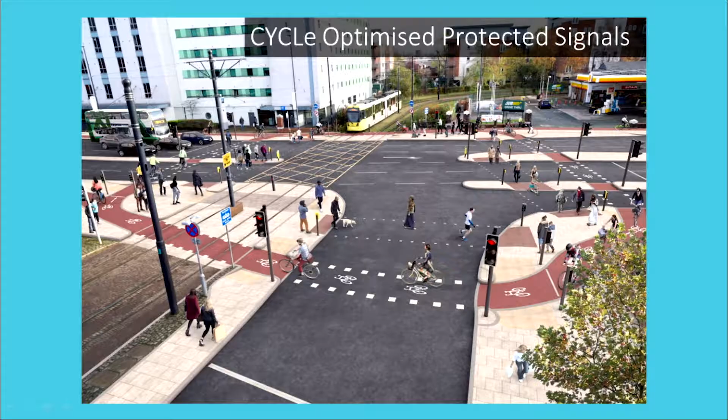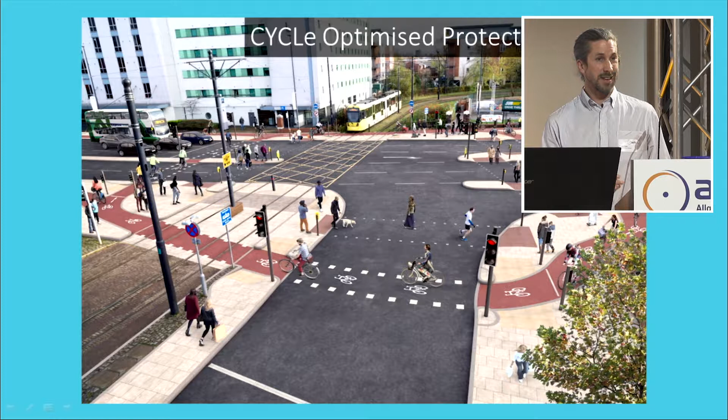I'm here to talk about protected junctions in the UK context, which is somewhat different to the rest of the world. There's been a big political impetus over the last few years to improve cycle safety because we really need to get more people cycling. Back in 2014, we only had about 2% of cyclists in Greater Manchester using that as their preferred way of getting to work, so we really need to do something about it.

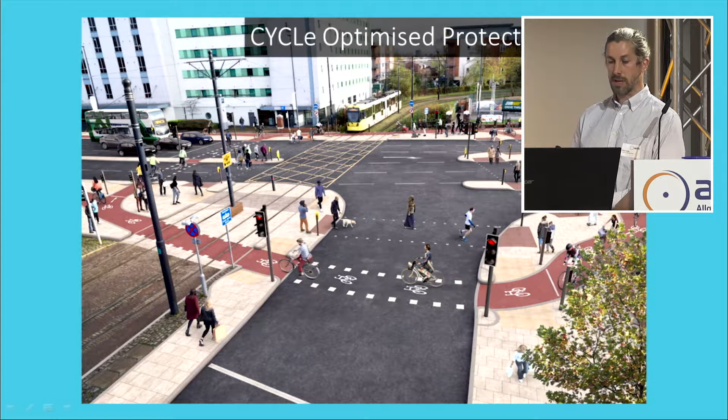What this image shows here is something we've called the Cycle Optimised Protected Signals, or Cyclops. They do look relatively complex, but essentially we're putting the cyclists always around the outside of the junction, which means we can retain the flexibility to have trams, all modes of transport dealt with, pedestrians with walk-with-traffic elements, staggered islands, triangular islands, etc.

A bit of history. Before 2010, we had very limited options in the UK. On the left-hand side, we've just got the advanced stop lines, which put the cyclists just out in front of the traffic and gave them a limited head start. So it really just increased the conspicuity, but didn't massively improve the situation for cyclists.

On the right-hand side, we have a toucan crossing, where the cyclists and pedestrians share the same space. It's a really easy option for traffic signal engineers because we can just deal with it like a normal pedestrian crossing, but it's wider, and the cyclists and pedestrians share the same space. But they don't really like that because they prefer to be separated, and vulnerable users have a real issue with cyclists sharing the same area.

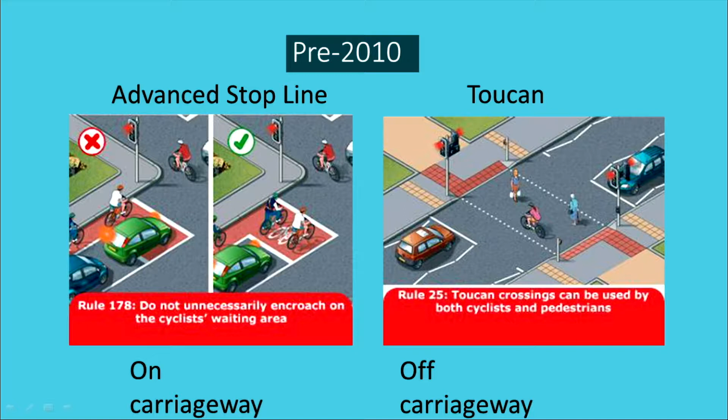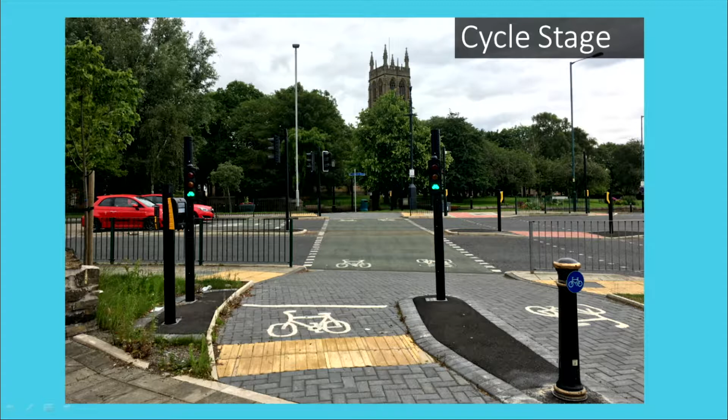The cycle stage is good if you've got a two-way cycle track to go straight through the junction, but we don't need to deal with any turning movements. So it's ultimately very safe, but infrastructure-wise, it takes a lot - you'd never be able to do it for more than one route across the junction, so it's not really applicable for multiple movements and where the cyclists need to turn.

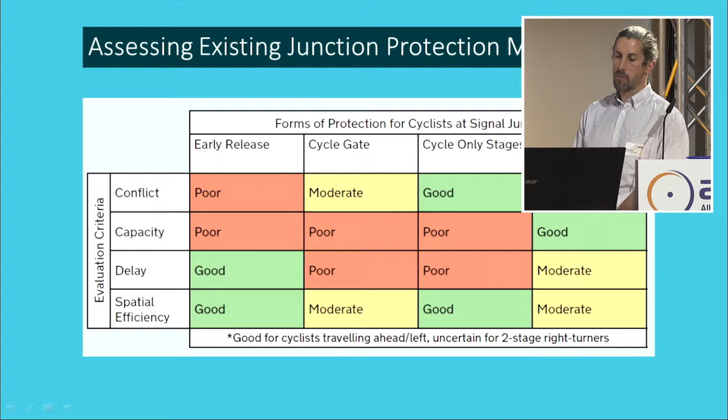So we assessed all of these current strategies and wanted to see whether any of them were particularly good, and you can see on the table that no single protection element is scoring particularly highly. An early release is poor in terms of resolving conflict and capacity, but it's better in terms of delay and spatial efficiency, whereas hold the left with the two-stage right turn doesn't score green apart from with capacity, but is not so good in terms of spatial efficiency, delay, etc.

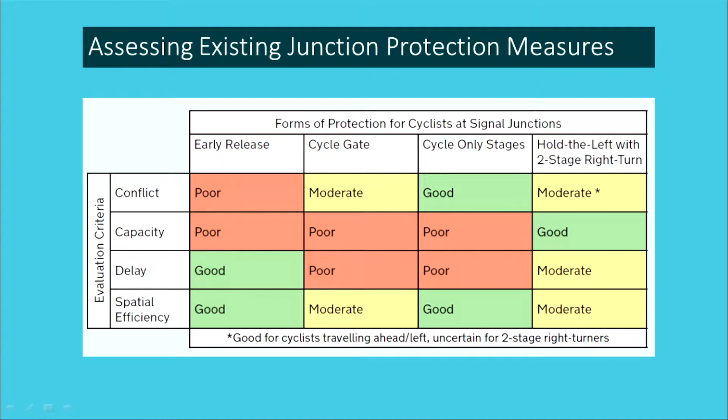So we looked around the rest of the world, and the obvious place to start was in the Netherlands. Now, we have a big problem in the UK in that it's different from the rest of the world. We can't run a green pedestrian facility at the same time that a parallel traffic phase is running. So in most of the world, you could essentially, in two stages, get protected junctions by allowing for the fact that traffic is allowed to turn left or right off the road that's been given green and then has to give way to a green signalled pedestrian or cycle phase. We can't do that in the UK, it's not within our traffic law, so we had to come up with a different solution.

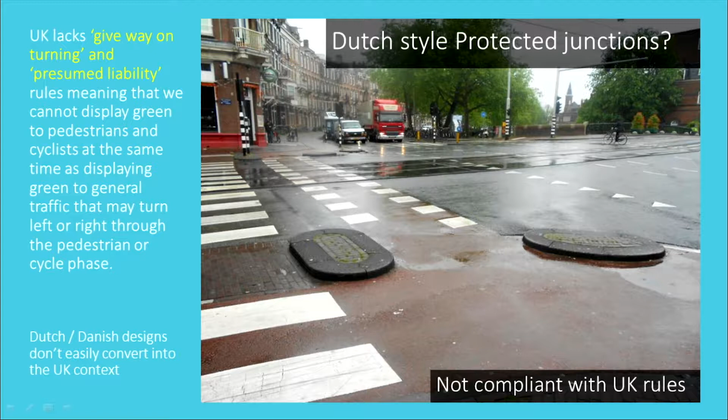So Dutch and Danish designs don't easily convert into the UK context.

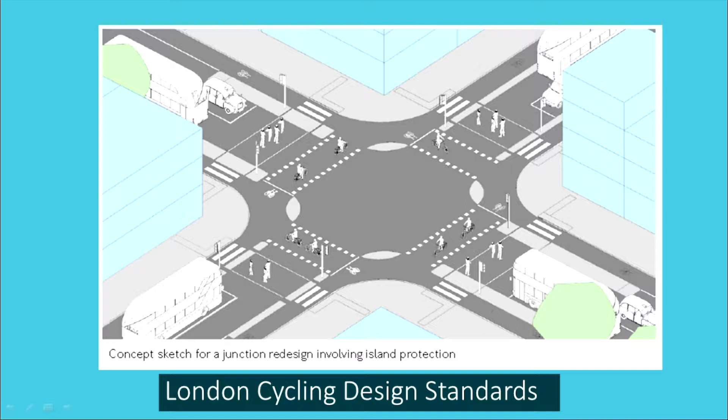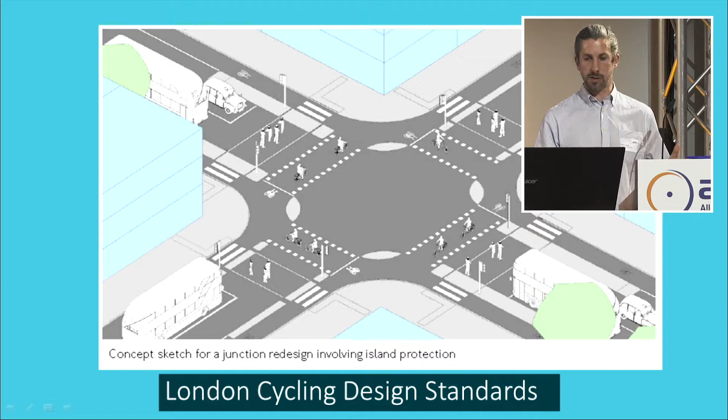This is from the London Cycling Design Standards. It looks a lot like the protected junction concepts that we've seen so far today. We tried to develop something like this in Manchester, but we could see there were a number of problems with it, not least the fact that there's zebra crossings that cross onto an island and then change into a signal control crossing, which would be a little bit confusing, we think, for the disabled and vulnerable groups. Also, the pedestrian crossings were further from the desire line, so we looked for something slightly different.

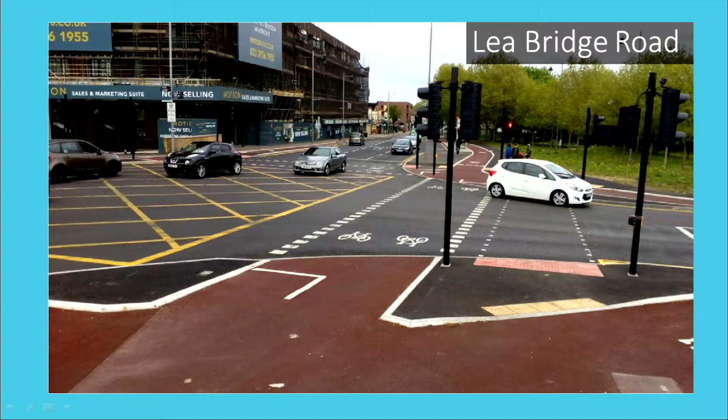In London, they have produced the first fully protected junction in the UK. Slightly different to European examples, but in essence fairly similar because the cyclists are on the inside, as you can see here. This doesn't enable us to do more complex junction geometry internally, so we shied away from that a little in Manchester.

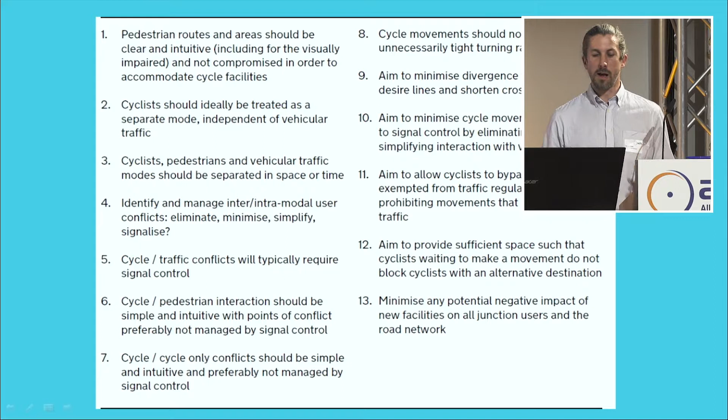We've produced a document called Cyclops Creating Protected Junctions. The link for that will be shown at the end of this presentation, but this is an excerpt from it. Basically, it's just detailing some of the golden rules that we have tried to produce in order to create a concept going forward. So, for example, number 2 there, cyclists should be treated as an entirely separate mode from vehicular traffic. So we want to keep them entirely separate, as we're seeing from some of our European colleagues.

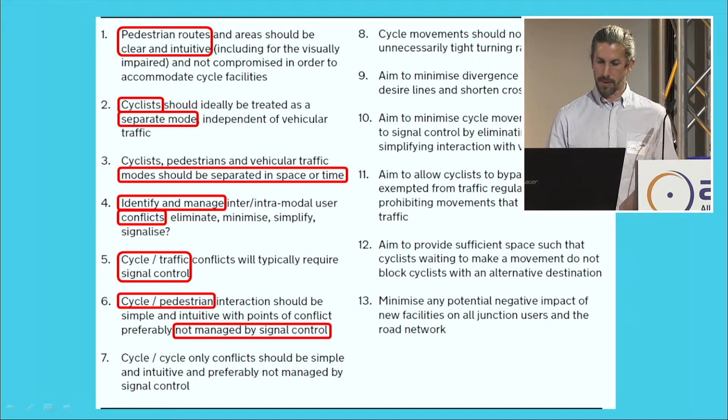Cycle traffic conflicts will typically require signal control. And just underneath that, we've said cycle and pedestrian interaction should be as simple as possible. So it was decided going forward that where cyclists and pedestrians interact, it's better if it's on a one-way element. So, for example, on a roundabout, we haven't got two-way cycles, because then the pedestrians only have to look in one direction. I won't go through all these in detail, you can have a look at the document at the end.

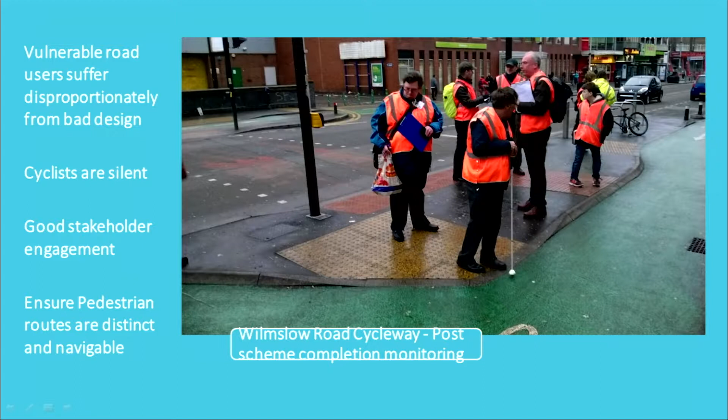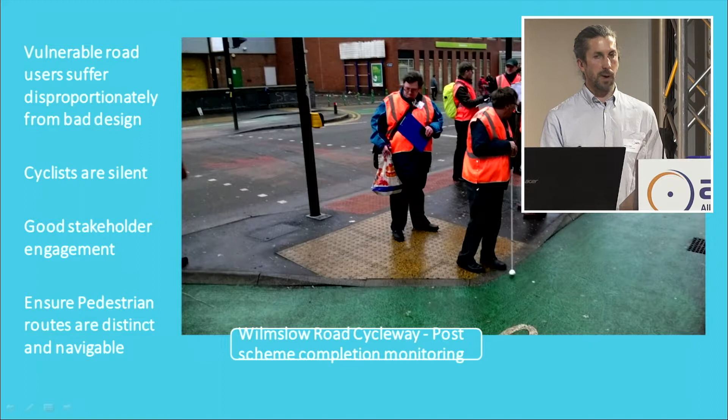This image here shows the monitoring that was undertaken after the Wilmslow Road cycleway. So we put in a scheme a few years back which did actually encourage quite a lot of cyclists, but we then since reviewed it to look at whether the facilities were good enough, and you really have to take on board the comments from the visually impaired groups and people who have trouble with mobility. So we've got to make sure that pedestrian routes are distinct and navigable, and you also have to remember that cyclists are silent, so visually impaired groups can't obviously hear the cyclists coming, so it's got to be very obvious where the actual crossings are.

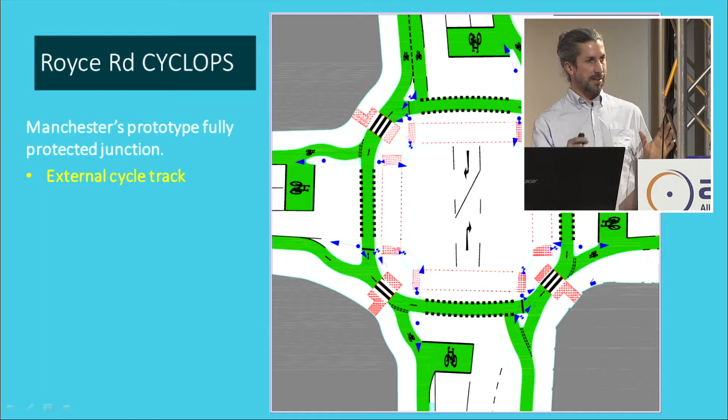This led us to our first concept in Greater Manchester, and it's called the Cyclops on Royce Road. So the key features here are an external cycle track that goes all the way around the outside. Now notice that's different from what we've seen so far today. The signal control pedestrian facilities are across the carriageway in the middle of the junction. We can have zebra or informal crossings of the cycle track on the outside. And cyclists actually have the ability to stay on the main road or filter back onto the main road and go through when they get their traffic green, or they can use the new facilities and go around the roundabout.

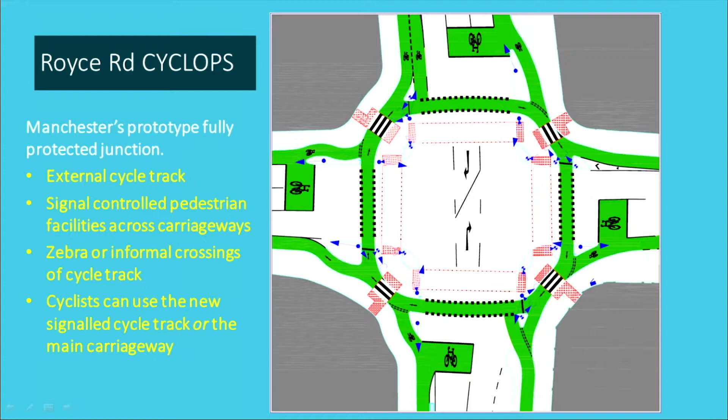Now, this junction design is essentially different from the rest of the world because we cannot rely on giving a green on the main road and then hoping that traffic will give way to cyclists and pedestrians. So that can't be done in the UK. In this scenario, there's a dedicated stage in which all the pedestrian and the cycle facilities run at the same time, with all the traffic phases held.

This is a visualization of that very junction, and we're happy that we've got the spatial fit right here. If you look at the islands, it's fairly obvious where the pedestrians need to be. We think they're amply sized, and the crossings of the cycle track should be fairly comfortable. And because it's a gyratory for cyclists, we believe that pedestrians should understand that the cyclists are always going to be coming from the right-hand side.

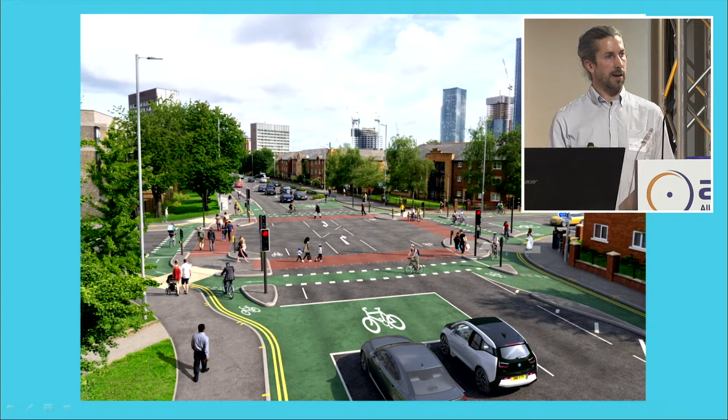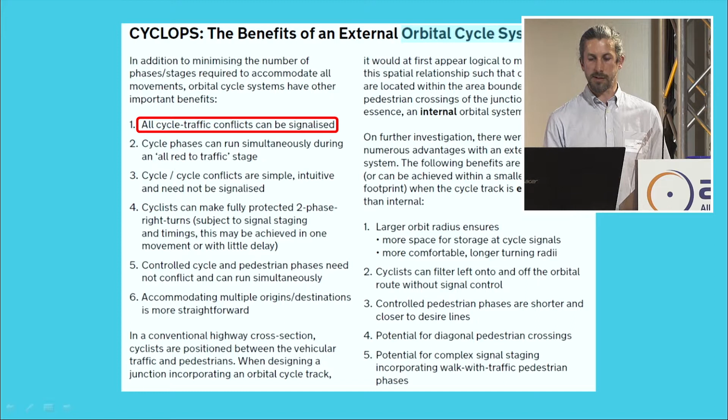So the benefits of an orbital cycle system, in general putting cyclists around the outside, is that we can signalise all traffic cycle conflicts very simply. Cycle phases can run simultaneously, especially when there's an all-red stage. Cycle conflicts need not be signalised, and it's possible to make two-phase right turns. So if you're turning right, which is the equivalent of your left over here, this can be done simultaneously if we run the stage for long enough.

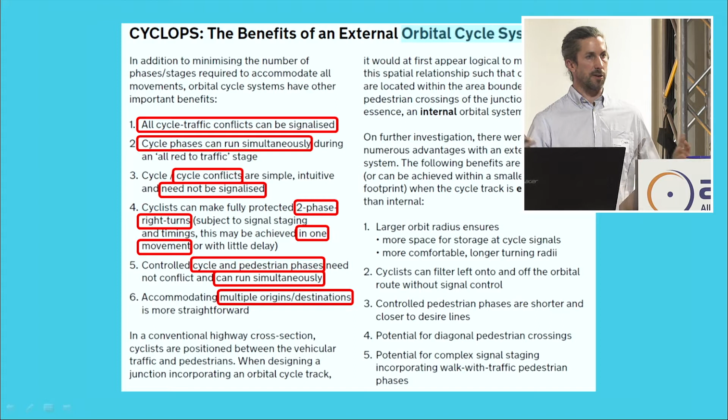Cycle and pedestrian phases can run simultaneously, and importantly, if it's a gyratory, multiple origins and destinations can be dealt with. So you could have a four-arm junction where there's actually more than 4 cycle origins and destinations. So you could have potentially 6 or 7. And if it's a roundabout gyratory, it's easy to deal with multiple origins and destinations.

Now, the benefits of externally putting the cyclist around the outside rather than internally - the real big one is you've got a larger orbit radius, and that means you've got more room for cyclists to store at the individual cycle stop lines, and you've got a longer turning radii. So you haven't got a very tight turning radius when you come off the gyratory, so you can have a 4 metre, say, internal radius minimum.

Cyclists can filter on and off the orbital route without signal control. Pedestrian phases are shorter because you're only crossing the junction in the middle, and they're on the desire line, so we haven't had to displace them further away from the junction. There's a potential for diagonal pedestrian crossings as well in this scenario if you have the cyclist around the outside.

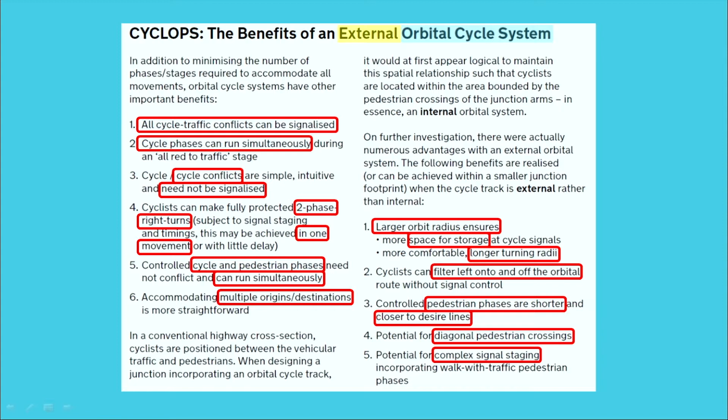And as I've also mentioned, there's a potential for complex signal staging, so you could have a relatively high capacity junction with triangular islands, staggered islands, various interesting signal phasing, which is all contained within the ring of the cycle phases. This is the image from the front of the brochure for this symposium.

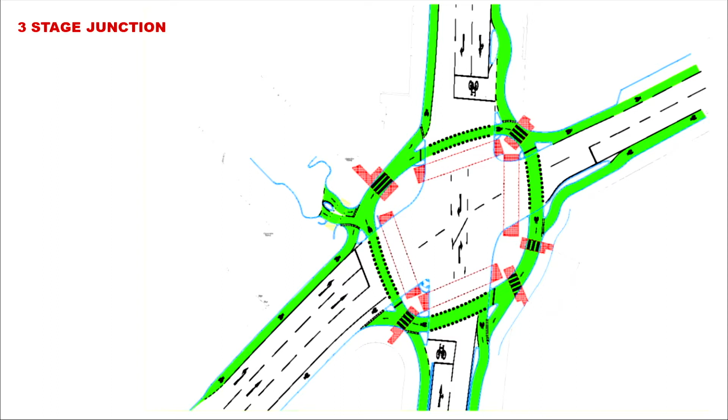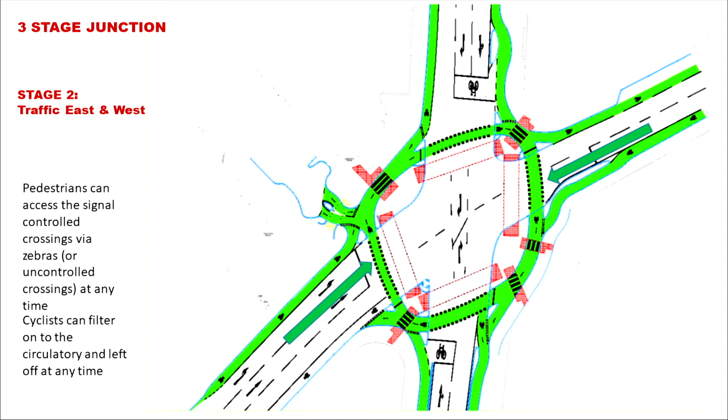And just to discuss the detail in terms of staging, again, it's different from most of the rest of the world. What we would do here is traffic north and south in one stage, fairly straightforward. Traffic east and west in the next stage. And then pedestrians and cycle facilities all running at the same time.

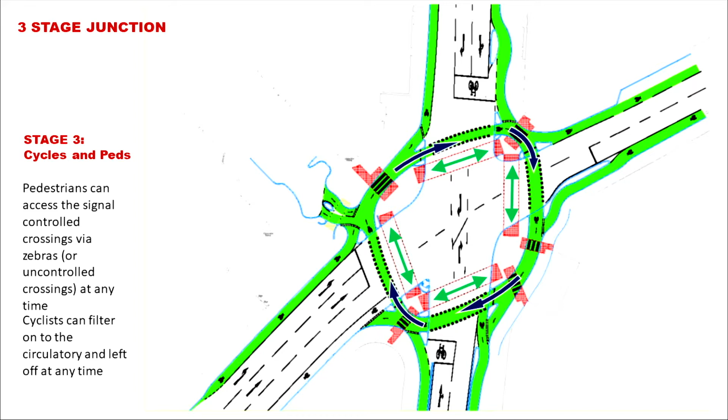Now, this junction in Manchester hasn't been built yet, but the existing one already has a pedestrian stage, so we're not actually reducing the capacity by putting these cycle facilities in. So it already runs as a 3-stage junction. We're just adding the new cycle phases around the outside of it.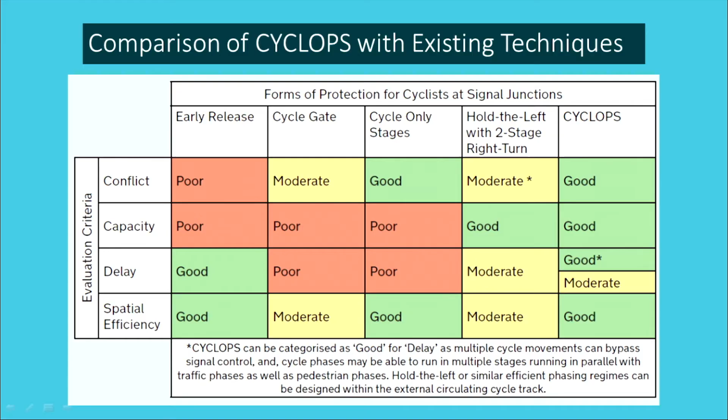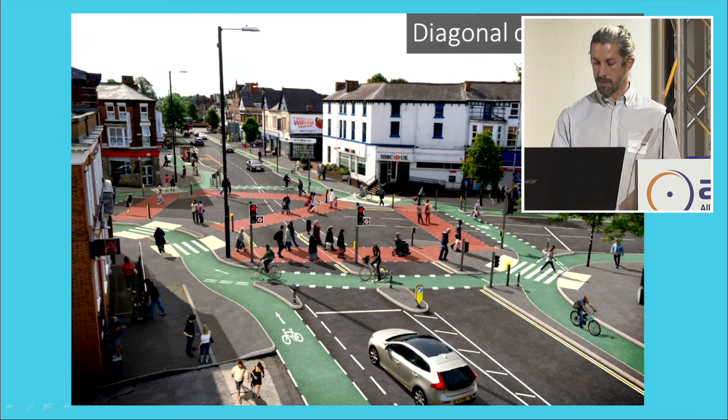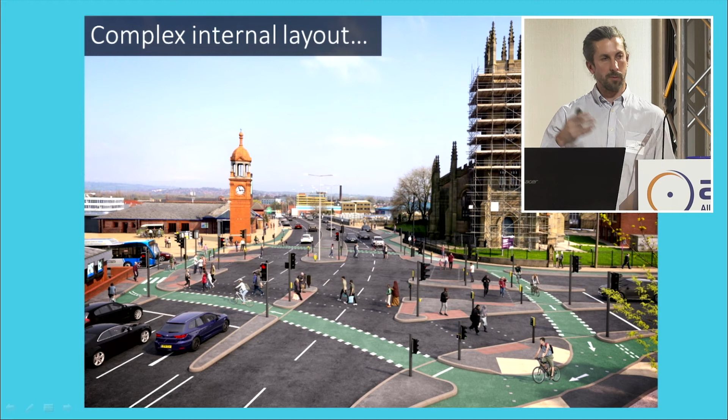This is one with a complex internal layout, as I mentioned. You've got a triangular island that can be seen. There's a staggered island. The 2 side roads are actually skewed relative to each other, and that means that the cycle orbital track that goes around the outside is skewed and isn't quite as round as it was previously, but again, it's visually similar to all the other ones. We hope it's going to be transferable and people will start understanding it if we use these more and more in Greater Manchester.

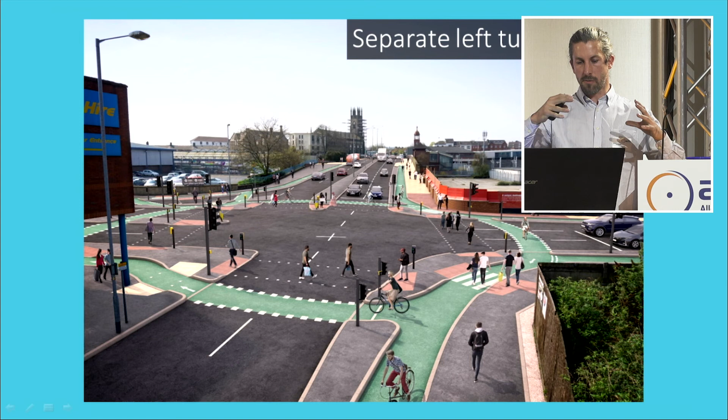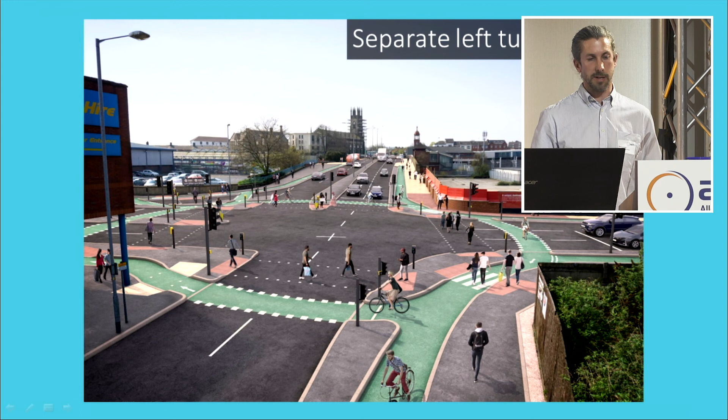Finally, one other example. Again, you can see the familiar cycle lane around the outside with a heavy left turn on this one, which is just shown on the top right-hand side of the image. So this has a CYCLOPS around most of the junction, but a left turn has been appended onto it, and there's a triangular island which is big enough to deal with the interaction of the cyclists on the circulatory crossing the left turn slip itself. So a slightly different version there.